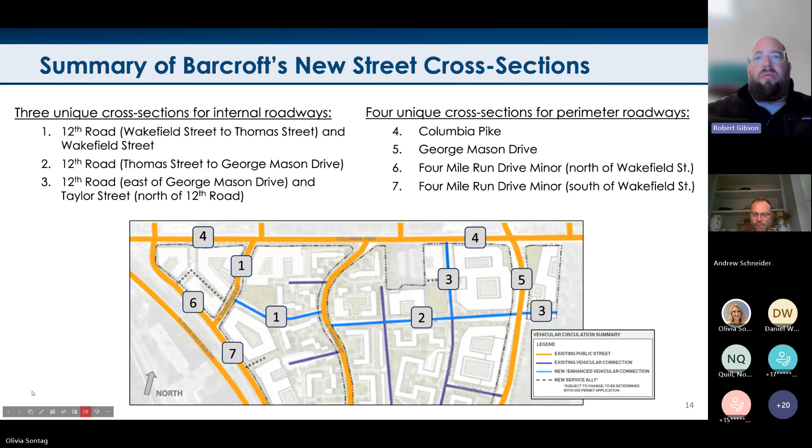Mike Pinkoske is going to walk you through the individual cross sections, but I'm going to talk about some of the overarching things that you'll see in commonality throughout this plan. And this summary here provides sort of a quick reference for what's going on within the cross sections if you get lost as Mike is talking.

For those internal streets, we're recommending all sidewalks provide a minimum clear sidewalk of 6 feet. On the exterior streets, a minimum of 8 feet of clear sidewalk. All of the sections include tree planting zones.

Those are generally ranging between 6 and 7 feet, so larger than sort of our historic 4 and 5 foot tree planting areas. Additionally, on-street parking was considered within the sections.

And then a number of the sections specifically support bicycle facilities that are not otherwise incorporated into the sections for the neighborhood's form-based code. We have used a standard 6-foot bike lane for when bike lanes are separated and provide one direction of flow.

And then we have two different sections for shared use trails or cycle tracks. Along George Mason Drive, the county's plan proposes a 12-foot shared use trail on the east side. And then for that segment on 4 Mile Run Drive Minor that will connect bike facilities from Wakefield to the W&OD, we're proposing a 10-foot wide cycle track.

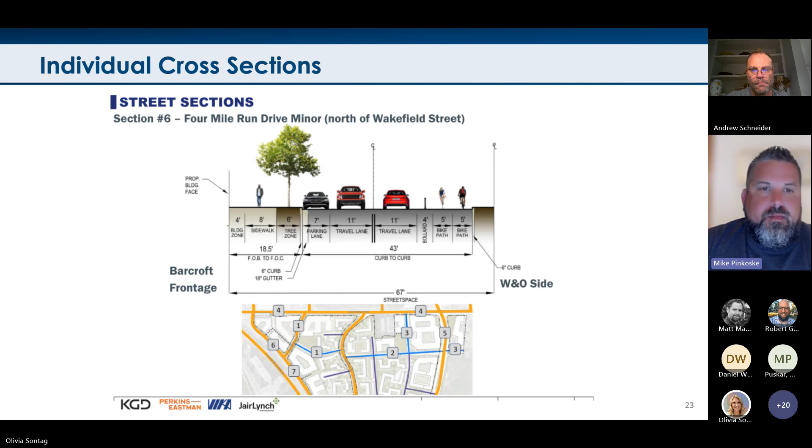Next section, please. So this is the 4 Mile Run section, minor, north or west of Wakefield Street. This will provide a connection from the Wakefield bike lanes. It'll be on the W&OD side, the southwest side of 4-mile run. There'll be a 2-way bike facility with 4-foot buffer, 11-foot travel lanes, and adjacent to the new redevelopment, there'll be a 7-foot parking lane. Along the new development, there'll be a 6-foot buffer, 8-foot clear sidewalk, and a 4-foot building zone.

The final section is very similar to the last, except on the W&OD side. Southeast of the Wakefield connection, there'll be on-street parking. Again, we need to accommodate 26-foot clear for fire, so the travel lanes will be a little wider, but the same streetscape adjacent to new development: 6-foot tree zone, 8-foot clear sidewalk, 4-foot building zone. As Kathy mentioned, we're happy to answer any questions the group has. Thank you.

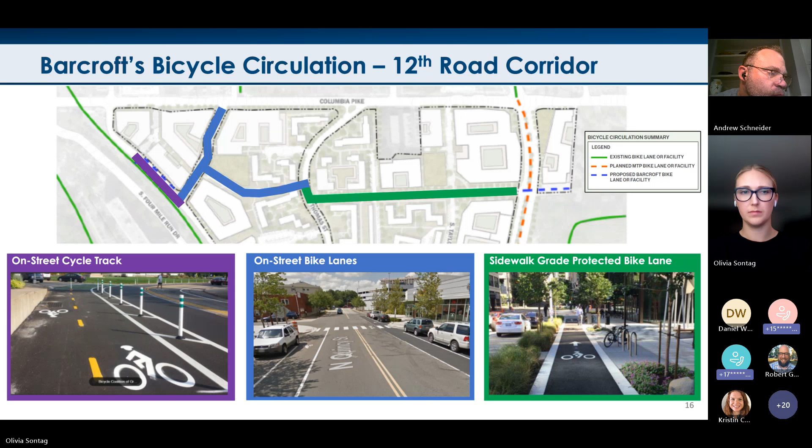Okay, right, sounds great. I do want to share one thing: the county is also looking at either concurrently with this effort or in advance of the development, making improvements to the 4 Mile Run Drive minor bus stop facilities and access. Excellent, great, glad to hear that as well.

From my reading, am I assuming correctly that you are also dealing with the east side of George Mason, where there's a small amount of development and Doctors Run Park, with bus stops? I deliberately drove through this afternoon to reconfirm - there are 3 bus stops on George Mason on the east side from 4 Mile Run north to Columbia Pike, and all they've got is a flag and a piece of sidewalk. So I'm assuming you're talking about the bus stops on both sides of George Mason Drive, and if that's incorrect, I'd appreciate being corrected.

For George Mason Drive, anything within the Barcroft area appropriate for redevelopment would be addressed. Anything outside of that area, specifically on the east side, would likely be addressed as part of the George Mason redesign process when we integrate the trail. But the bus stops within the project area will be addressed as different developments come through, unless another project effort comes through, like Rob mentioned for 4 Mile Run.

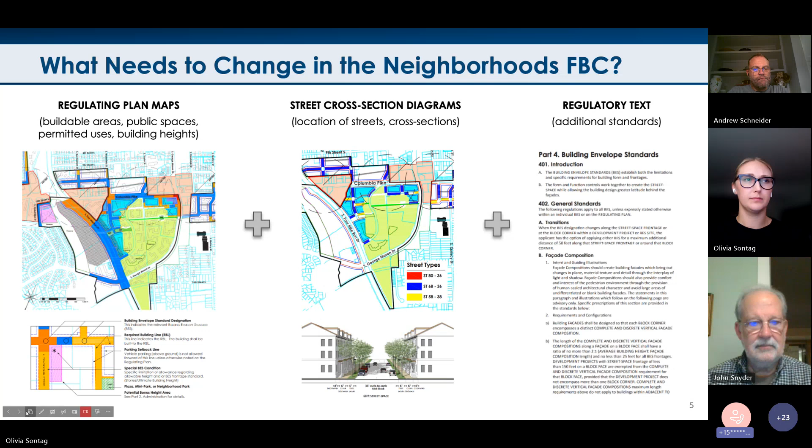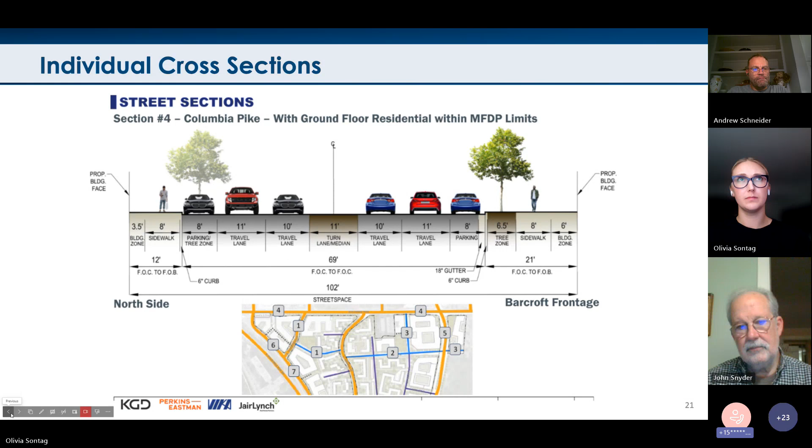My understanding, John, from our previous discussions within the form-based code group, is that on slide 21, section 4, box number 3 east of George Mason is not 12th Street, but an extension of 12th Road, and it's only intended to give access to the area that JairLynch can develop on that southeast corner. So my understanding is there was no intent to extend 12th Street, and you are absolutely correct. We've certainly discussed this for years through the creation of the neighborhood's form-based code, that 12th Street was not to be continued through to Quincy Street.

So again, my understanding is that on slide 21, section 4, that segment identified as 3 is strictly a section of 12th Road to give access to the area that JairLynch will be redeveloping.

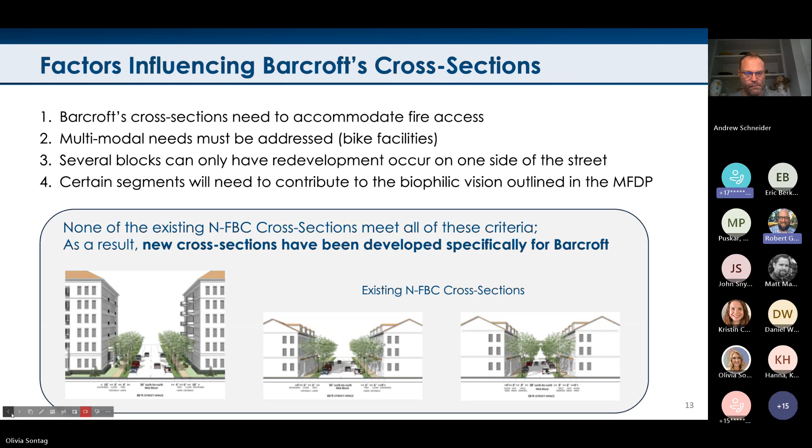First of all, sorry - not section 3, not slide 3. Sorry. That slide 3 is also germane to the conversation, so I'd like to go back to that too, but go ahead.

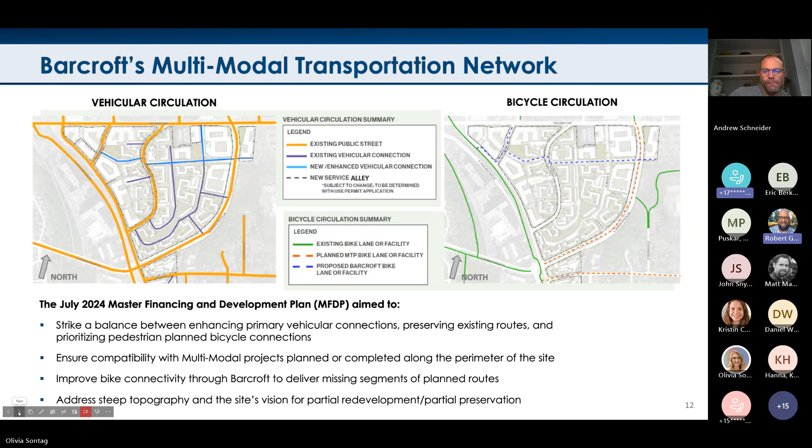So section 3 shows a typical section with development on both sides of the street - the parking lane, the sidewalk, and the building zone. Adjacent to the park, we would treat that as an undeveloped site, and the code has language on how to deal with that. In that case, you wouldn't see the parking lane, the sidewalk, or the building zone - those would all be within the park.

What we're saying about the bike connection is that it principally is something that's going to have to happen within the park. We don't see any way around this issue. There is a bike connection today that the improvements on George Mason will help facilitate. But as Doctors Run Park gets built, we recognize that the park planning process will have to address community goals for connectivity and access to the park, and circulation within, while balancing natural resource goals. That's a long-winded way to say we're going to have to work with DPR and the park design to get specific connections delivered in the park.

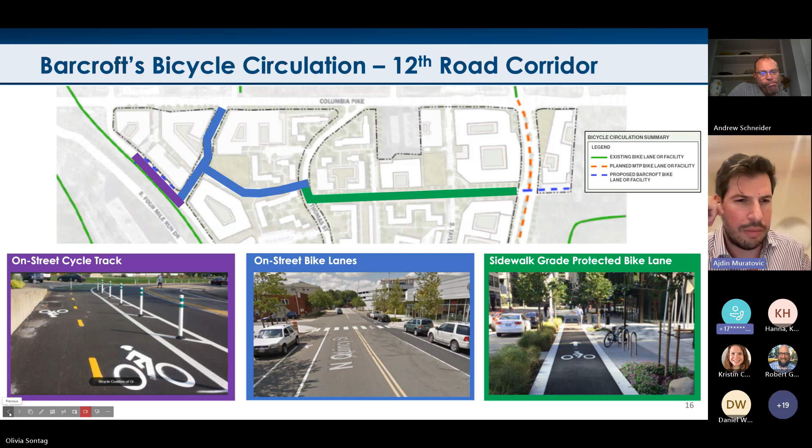It gives us very little room to maneuver from a transportation perspective. So what flexibility do we have on the building zones for the doors? Some of them are 4 feet - could they be 3.5 feet, 3 feet? Someone else has already asked that question earlier, but I don't remember it being answered here.

So I think what you're alluding to is Chair Weir's question, and I think I didn't get a chance to answer it, which was a request for more discussion about providing protected bike facilities on the segments shown with on-street bike lanes, to give a little bit more thought to the impacts that type of facility would have on the cross section.

So how wide would it get, what constraints would that create? I think we didn't say this at the beginning - we've put a lot of thought into this, but we haven't closed the door on addressing feedback in this process. So we intend to take these comments back and provide responses, and look at if there's a way to address providing protected facilities.

At least on the segments that are not constrained by pinch points, and how that might be impacted by those pinch points. And then we can provide a little bit more detail on the section of the code that the fire marshal is looking at for their requirements.

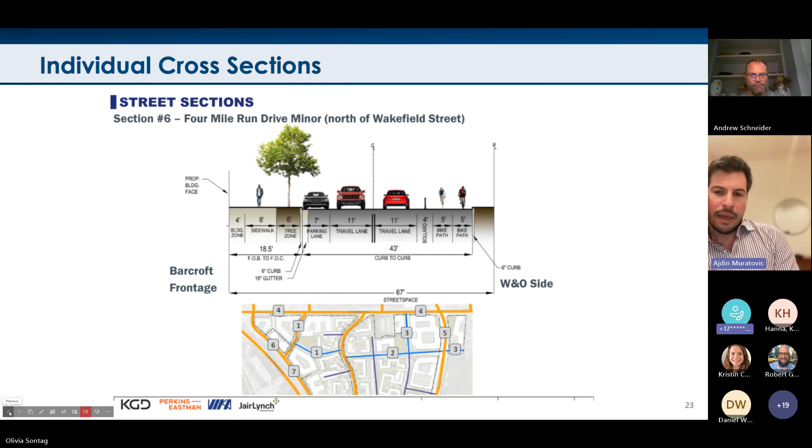I know there was discussion earlier regarding the Penske side and potential pedestrian access going up to Quincy. I think the consensus is that's not going to be a road for vehicular transportation. That might be an opportunity to adopt what they've been doing in Paris with closed streets that only allow pedestrian and cycle traffic around school zones, and that are very kid friendly. So that might be a way to increase block porosity, continue that 12th Street without putting a vehicle on it, with the request of the neighborhood there. But that's further down the road.

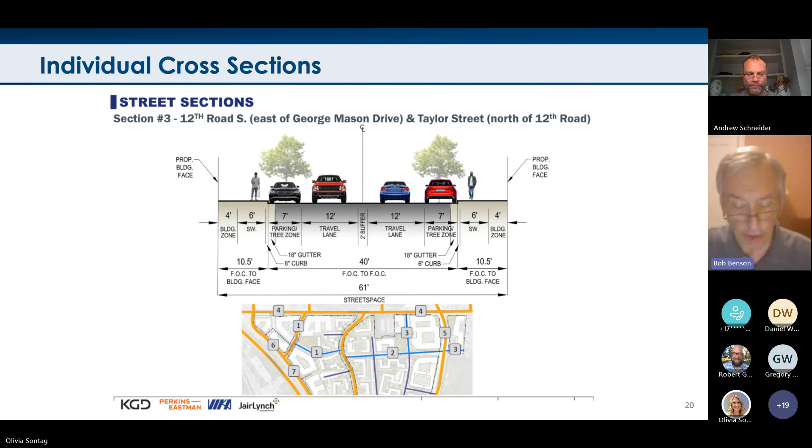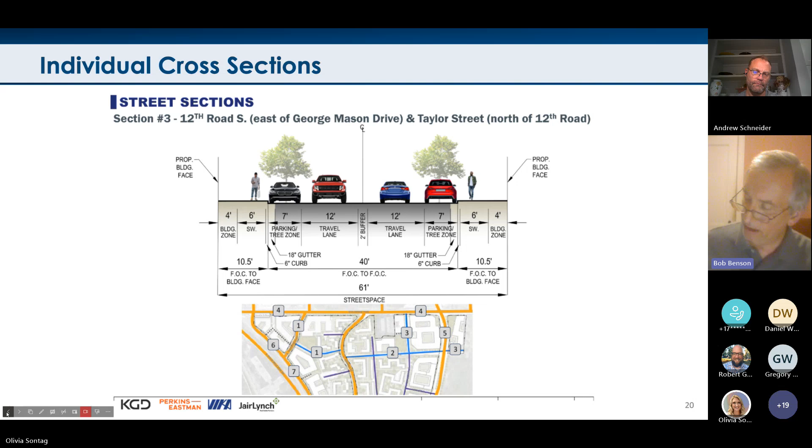I appreciate that the plan shows wider tree zones for trees along these streets—that's important, and we appreciate that. In FNRC's comments on earlier meetings about the plan, we said, quote, 'reimagine 12th Street, 12th Road as a grand tree-lined boulevard.' I think the plan is moving very much in that direction. We hope trees are not an afterthought here, and they don't appear to be. I want to mention the Forestry and Natural Resources Plan is one of twelve parts of Arlington's comprehensive plan, equivalent to all other elements including the transportation plan. So the comment I'm about to make recognizes that Arlington often faces a creative tension between conserving or enhancing green space, which we need, and providing things like bike lanes.

And so I guess that's all a lead up to a comment I want to ask: why do we need bike lanes within the bounds of the Barcroft community? Because we have major bike lane access along both the George Mason side and definitely on the 4 Mile Run side. As a biker, I ride or walk my bike on neighborhood streets all the time to get to bike lanes, and it seems to me the residents of Barcroft have relatively easy access. They could walk their bikes down to the 4 Mile Run bike trail, for example. So I'm asking that in the context of us talking a lot about how wide the bike lanes need to be. I want to be on the record as saying there are other interests we have to consider as well, like the lady who was just talking.

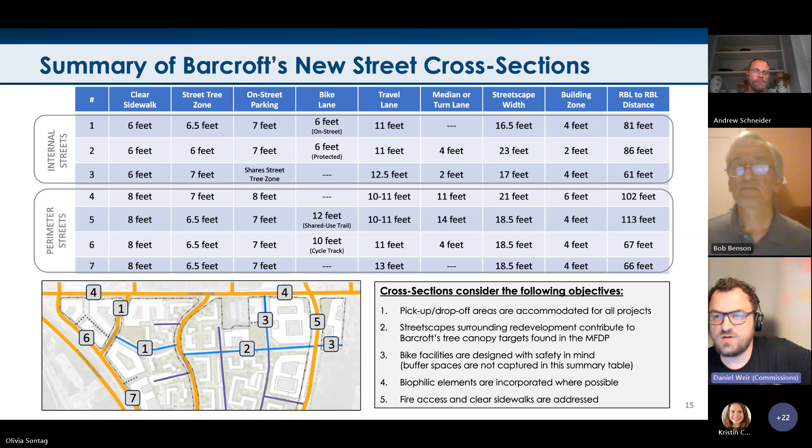This is going to be last call for anyone to raise their hand to weigh in, because we're going to go to public comment after Mr. Muratovic.

I'll be quick, but I'm circling back, unfortunately, to the fire marshal. One thing I wanted to clarify, I think Rob hit on it, is it's an aerial access requirement. I also wanted to confirm, aerial access makes it sound like it should be for a high rise or something, but I think I was told by the architects, I may get this number wrong, that it's anything greater than about 35 feet in height that requires that aerial access. I also wanted to make sure you didn't think I was being flippant when I said, more power to you.

We seriously mean that. If you can achieve something different than we've been able to achieve on multiple projects, it is a conflict with some of the urban situations we're trying to create, it does have an impact. I didn't want you to walk away thinking that I don't agree with you or support that concept. It's just that we've discussed it on multiple projects and made adjustments to address those concerns.

Well, for what it's worth, that is not what I took away from it. I took the comment as being in earnest, and as you just clarified, this body does not take votes and make recommendations. But I don't want to speak for Mr. Berkey, who is here as the representative of the Planning Commission, but it is within the purview of the Planning Commission to make findings and recommendations. I wouldn't be surprised if this is something that catches the interest of my colleagues on that body.

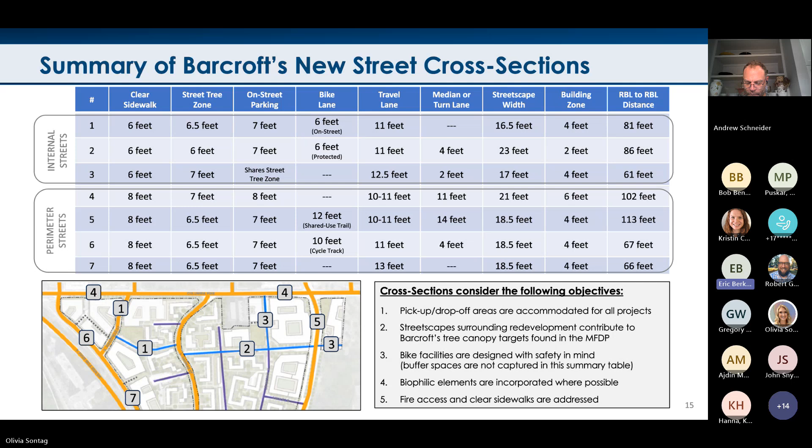Hey Kathy, it's Eric. No offense taken, that was not how I took it, but so appreciate you saying that. We're all good. I always appreciate your thoughts and take them wholeheartedly, and I so appreciate your sentiment, but no worries, we're good. Thanks.

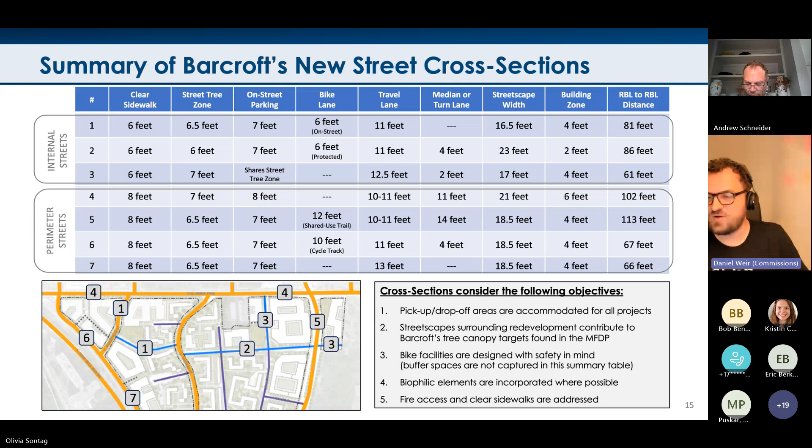I'm going to go to Mr. Muratovic, and then I'm going to go to public comment. I believe Ms. Van Hine is our only commenter.

Mr. Muratovic, did we lose you? You're muted. Sorry, I was muted.

Thank you. Mr. Benson raised some good points about the tension that does exist with limited street space. He said we can't have a bike lane on every single street, and I agree with that, but we are far, far from that in Arlington. We have fragments of a network, but I kind of reject the notion that there is this tension between tree canopy and bike lanes. There's a tension between why it is with bike lanes, why isn't it with parking spaces? Why isn't it with travel lanes? Just because someone is able to walk their bike or ride a bike down a road without a protected bike lane doesn't mean other people are comfortable with that or willing to do it.

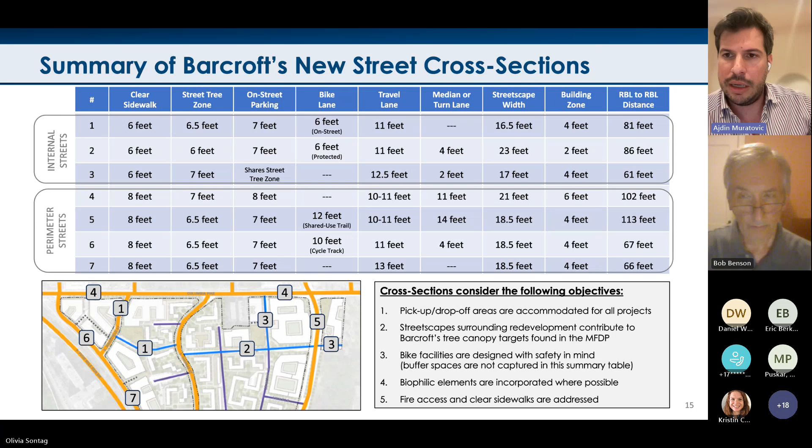I'd like to move away from this anecdotal approach to a fact-based, data-driven approach. All of that states that in order to have safety, in order to have higher usage, you need a network. And if you want to make an environmental argument about something, then go for the parking spaces, go for the cars. To take this away from cyclists, especially when there's a school so nearby, to have children biking down a road that doesn't have a protected bike lane, or to ask them to get on a sidewalk and then get off a sidewalk, and then we have the other accessibility concerns of people using potentially mobility scooters. I just think it's a false tension, and I'm glad Mr. Benson feels so comfortable biking all over Arlington, but the fact of the matter is a lot of people don't. So I support the staff's efforts in creating a parallel network to Columbia Pike, because unfortunately we can't have a bike lane down Columbia Pike due to the narrowness of that road. So thank you.

Could I just make a quick comment? Mr. Benson, I see that you're not on mute. I am not inclined to go more. A question and point has been made, a response and counterpoint has been given. In the interest of time, and because I believe we're well over time, I'm not inclined to invite a back and forth. I was going to agree with much of what he said, Mr. Benson, but I am not inclined to invite a back and forth, though thank you for your contributions.

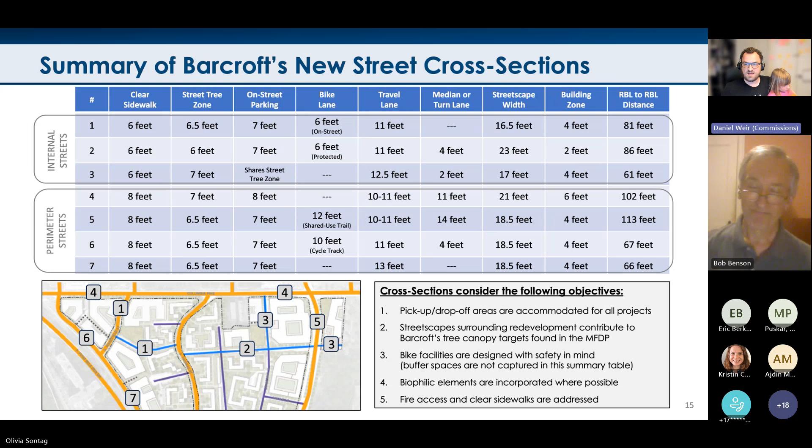I'm going to check in with Ms. Sontag and find out whether or not there's anything else for the good of the order that needs to be gone over or addressed, and then we're going to go to Ms. Van Hine.

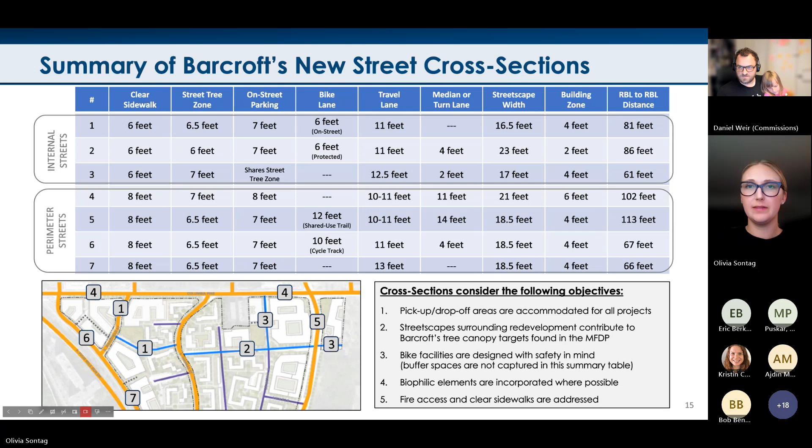The first thing I want to say is, yes, we need to reconsider some of these intersections, cross sections, especially the first one, which is really scary. And my first comment about that is it is against Vision Zero principles to be building something that is possibly that dangerous.

We really need to support bike networks. As a pedestrian, I am a strong supporter both of separate safe bike facilities and trees, and I don't want to fight about it. I want all of us to have the space that we need. If you can find more space, if you can take some more space from the shy zone, that would be great. Otherwise, we need to figure out something different in that space. But don't take away from the sidewalks, don't take away from the landscaping zone, and certainly figure out what you can do to make the bike lanes safer in general.

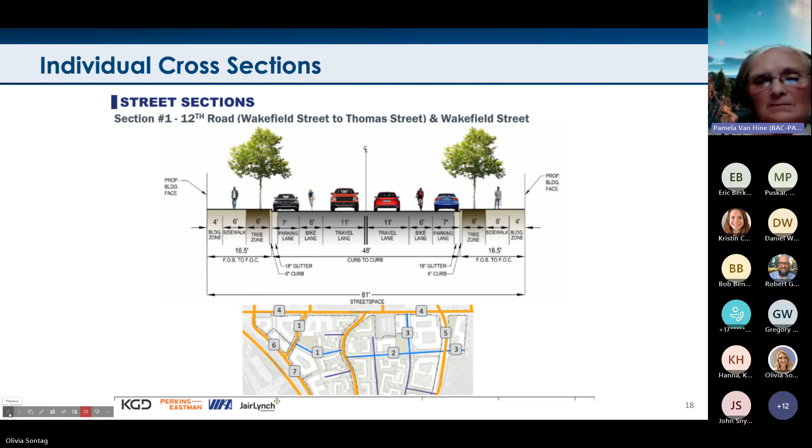I also want to verify that when you're talking about section 1, which is the bit of improved sidewalks between Wakefield and Thomas, it's not going to go beyond Thomas, because there's not going to be new buildings over there, and also because you have major retaining walls over there. I will say I find that unfortunate because that is a very sad section of sidewalk over there. I am very happy that you do have 6-foot minimum clear zones and 8-foot minimum clear zones on the site. I hope that in the internal sections for the older buildings that we're not talking about, you will still have the adequate dimensions that the BAC and PAC have promoted in our earlier responses.

I think that's it for now. I may send you some additional comments because I spent a lot of time preparing for this, and I had a lot of questions, but a lot of them were answered. This was a really good discussion, and I thank you.

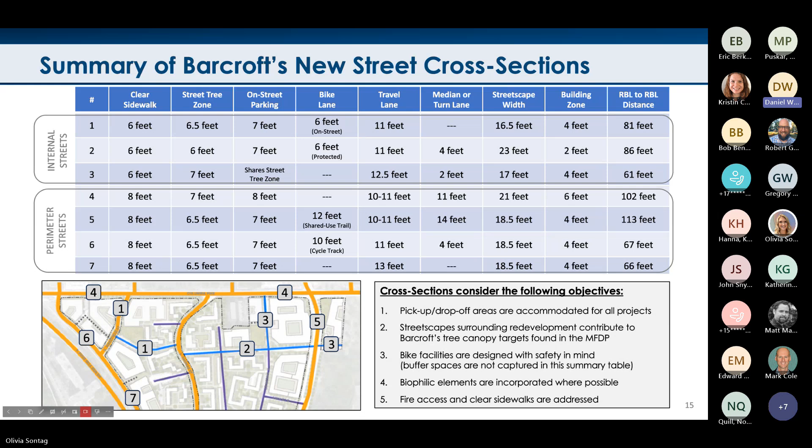Thank you, Ms. Van Hine. I expect that staff will be ready with answers to those either in direct follow-up or at our next meeting. Yeah, I can't come to the next meeting, it's the same time as the PAC. We will make sure that the questions are answered on the record, and we will also, even if it's just me following up directly with you, make sure they're brought to your direct attention.